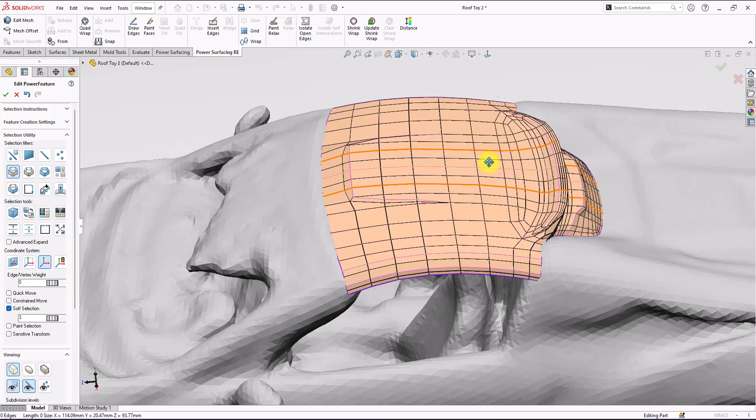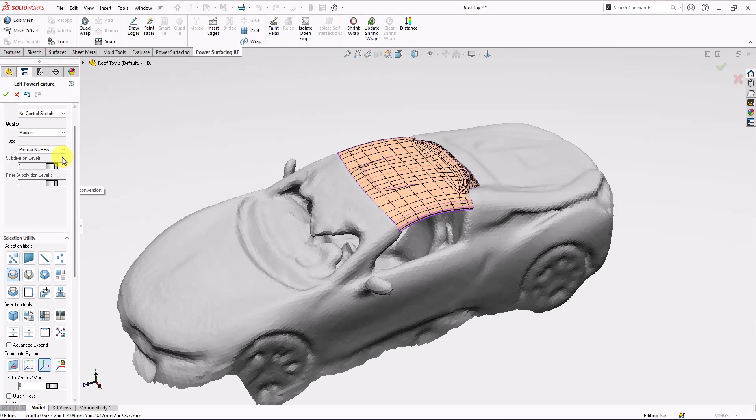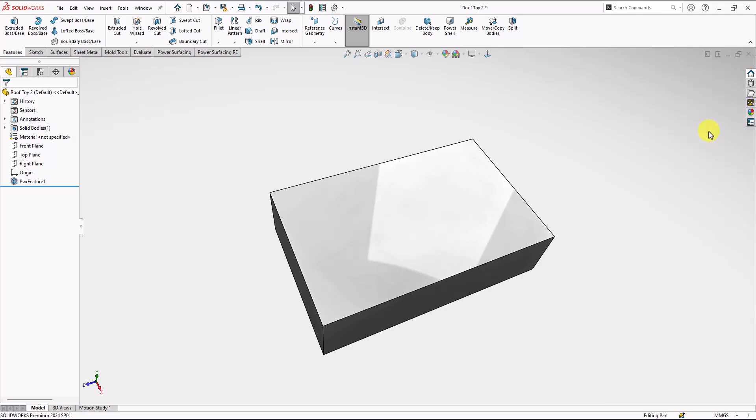I have this model here and I just modeled some surfaces on it, and I want to save it. The first solution, and probably the best if you're just going to use it on SolidWorks, is to go to this menu and select proxy box. That's the fastest way to convert it, and I'm able to have my part like a box, saved basically as a SolidWorks file, which will be a very small file. When I open it again, I can go and edit, have my part, and continue working. So that's the first solution.

The second one is I'm going to go to Tools, Power Surfacing, Save, and save as Cyborg3D. For the Cyborg 3D, I'm going to keep my mesh as it is. Let's try: I'll save as, type anything, and save. So I saved this as M4.

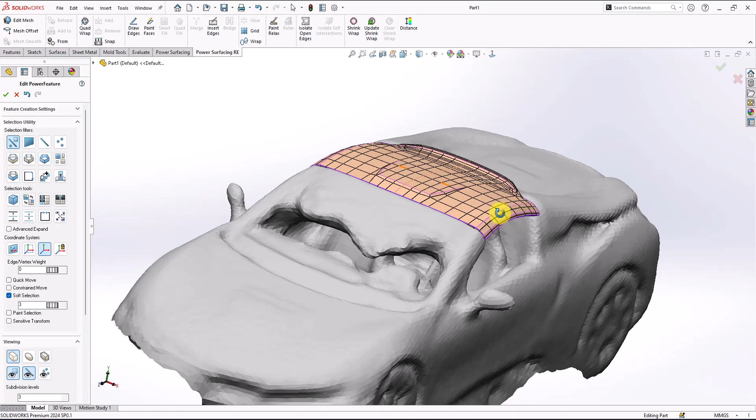Let me now close this. Now I'm going to go to my desktop and find my file, M4, and drag it directly into SolidWorks. Okay, so you can see everything looks exactly like we left it, and I can keep working on my subdivision. Let me just try this, as you see.

Okay, and we have the last solution, which is save control mesh. The control mesh here is for the subdivision, and the reference mesh is for reference only. We also have the subd mesh, which will save this as a subdivision surface as OBJ, without the creases and these lines.

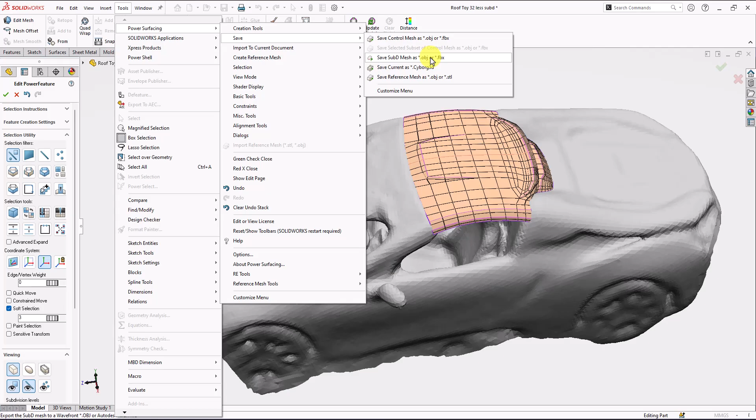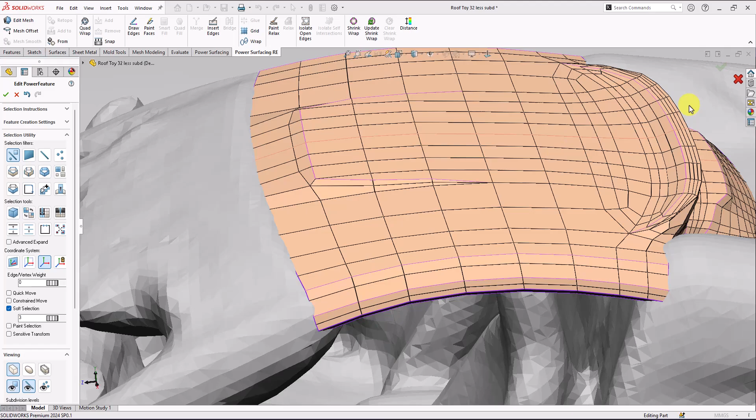Let me just show you. If I save this as M7 and save it, let's make an OBJ file with a high quality surface. I'm going to close those and go to M7.

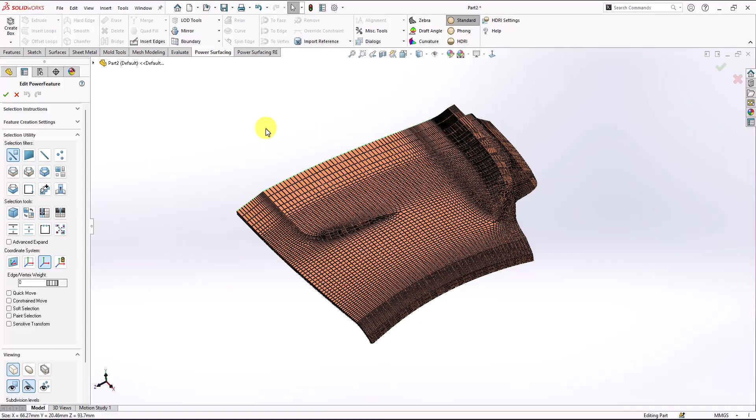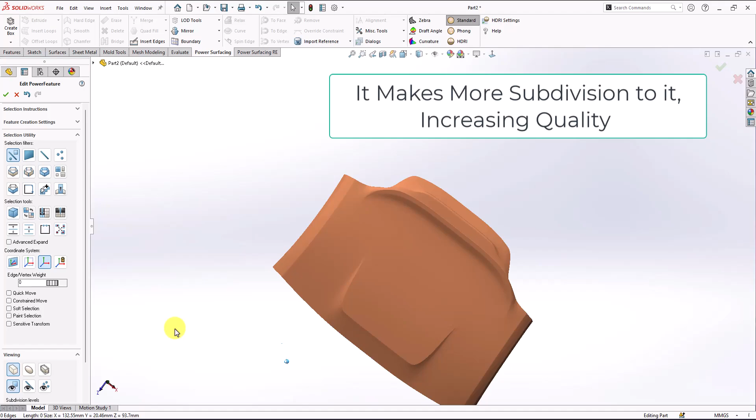Here we go. All the creased lines are just removed, and also the mirror. So we can just use the mirror again when selecting any of this side, and we can accept it. As you see, it still looks good and everything looks great, but without creasing, and you can't adjust it. So that's going to save you a high quality surface, but you can't adjust it later.

So as we said, the best solution is to save it as a box mode if you're just going to use it on SolidWorks, or if you're going to use the file later on SolidWorks. The second best solution is to save it as a Cyborg 3D. You can just change the type to Precise NURBS and convert.